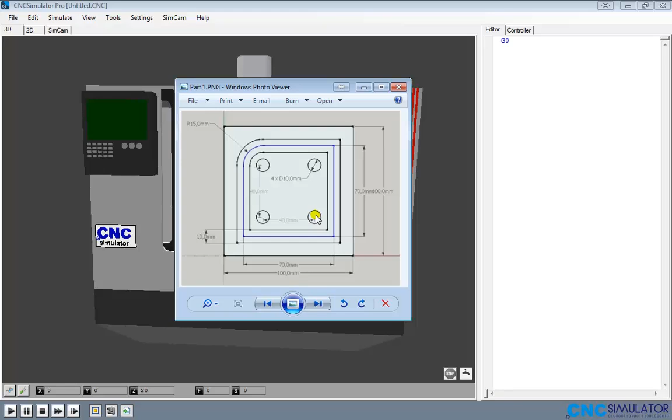And what we need to do is come up with the code in order to tell the machine to do this. I'm going to move this over to the side. You can keep yours open for reference as well.

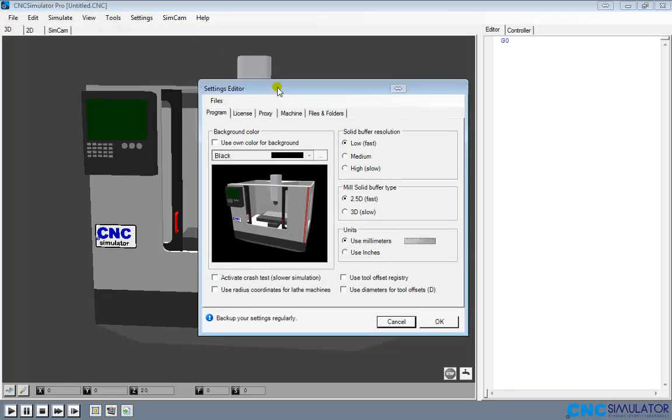The first thing we need to do is set up our units and load the correct machine. We can do that by going to Settings, and then going to Settings again. Go ahead and wait a second for it to open up. Alright, so we need to make sure we check our units here - right now we're currently going to be using millimeters for our units. Once you have everything okay with that, you can go ahead and select OK.

Then we're going to go back to Settings again, and we're going to go to Inventory Browser. Then what we need to check is to make sure that we're working on My Milling Tools, and we're going to set our tools. Right now I currently have the 2 that we're going to create already open - right now you should see 0 here. We're also going to go ahead and set the materials as well, but not in this area here - it's the mill workpieces we're going to be working on.

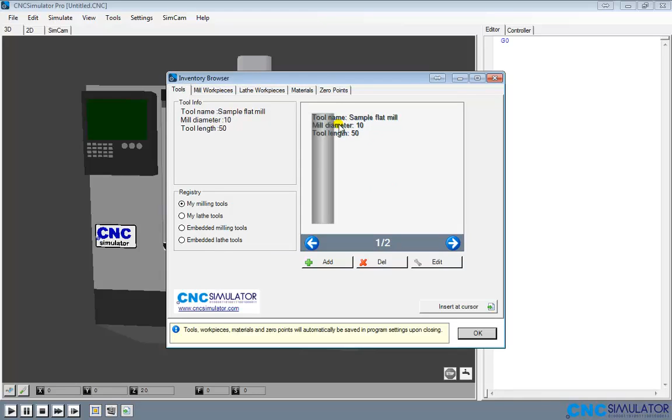So the first thing we need to do is let's set up a part. You can go ahead and click add, and we're going to create our new tool. You can call this sample mill. And then the information we're going to put in here is going to be the diameter. We'll go ahead and pull that out since I couldn't really see it too well - you pop that right back open.

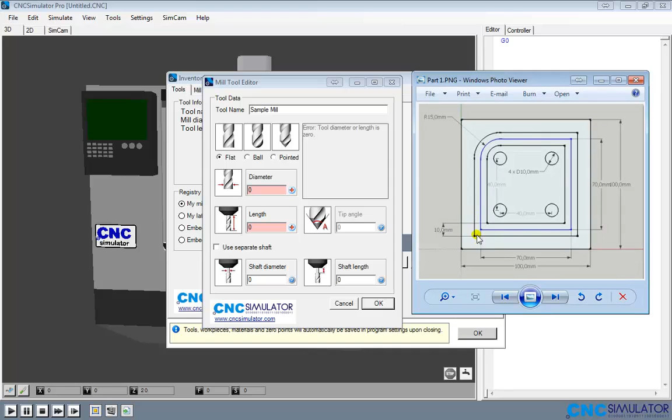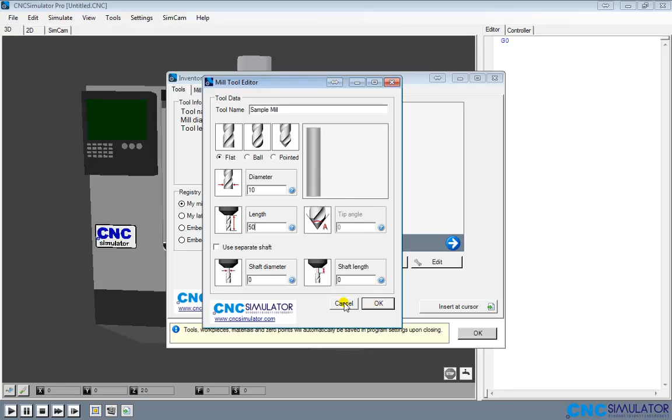Okay, so we need the diameter of this mill to be 10 millimeters, and we can find that within our information in this little left area here - 10 millimeters. So we can go ahead and adjust that to 10 millimeters. Type in 10, and then we're going to give this a length of 50. Once you're done here, you'll go ahead and see a preview. You can go ahead and accept that and hit OK. For now, I'm going to go ahead and cancel that because I already have one created here.

The next one we need to do is create a drill. So let me open this up again. We need to drill these portions here, and these again are going to be 10 millimeters. So we're going to go ahead and go to Add, go to Pointed, go to Diameter, and make that 10. The length will be 50, and the tip angle we are going to put to 80.

Remember, we need to name this, so you can go ahead and call this Sample Drill. And then hit OK. For now, I'm going to hit Cancel because, again, I've already created this.

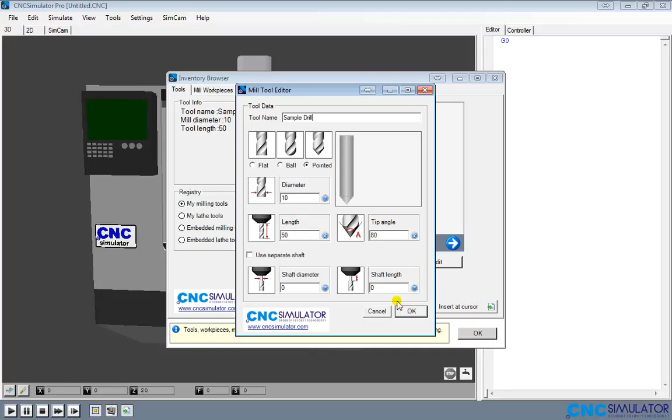So you should see your first tool - I called mine Sample Flat Mill. We have a diameter of 10 and a length of 50, and remember, these are in millimeters. I'll go ahead and move over one more - and again, a drill diameter, a tip angle, and a tool length.

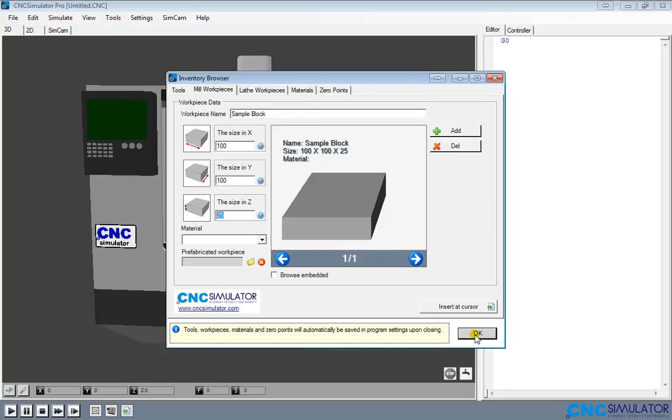Next, we're going to come over to mill workpieces. We'll go ahead and put the size of 100 for X, 100 for Y, and we'll also put 25 for Z. Again, we'll leave everything else the same. We'll go ahead and hit OK once you have all those settings set up. And currently we haven't really seen any changes - that's because we're going to have to come over here to our editor and start working on the code.

I'm going to go ahead and delete this G0 that I have set up from the previous video. Now for starters, I like to comment on everything, and it's very useful when you work on very large programs. In G code you may not really want to, but working in other coding languages you kind of learn to comment, so that way other people can read it and also help you out. So the first thing you want to do is go ahead and add a slash, so the code will kind of ignore this. Now the first thing we need to do is add part to machine.

So for us, we're going to go ahead and hit the $, and you'll see these various codes we can add. What we are looking for, we'll go ahead and type add regular part. If you hit space, it goes ahead and auto-completes it, and I kind of want to see the syntax on that, so let's bring that back up.

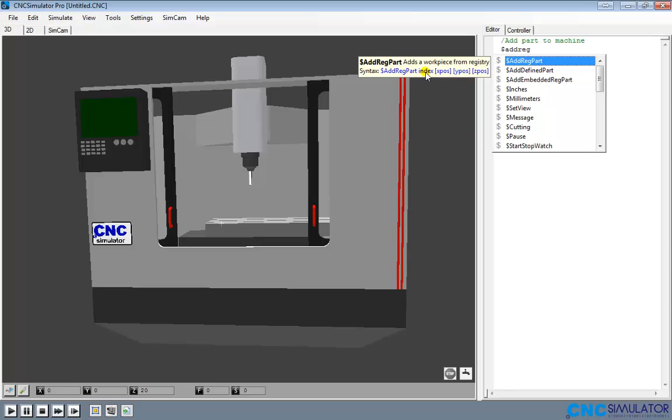I'll go ahead and hit the $, add reg part, it's the first one here. It says adds a workpiece from the registry, so you can go ahead and read the syntax. We're going to have the first portion here that we put, we also have the index - so far we only have the one part, so we're going to put a 1 there. And then we also have the X position, Y position, and the Z position.

Once we're okay with that, again I can hit space and it will auto-complete it for me. Now it's already trying to select the block that we just created once you named it. I'll go ahead and double click on that, and press space. Now we have to put the X and Y position of where we want to place this. Let's go ahead and put - let me delete here a little bit - we'll go ahead and put 30, comma, space, 30. Go ahead and press enter.

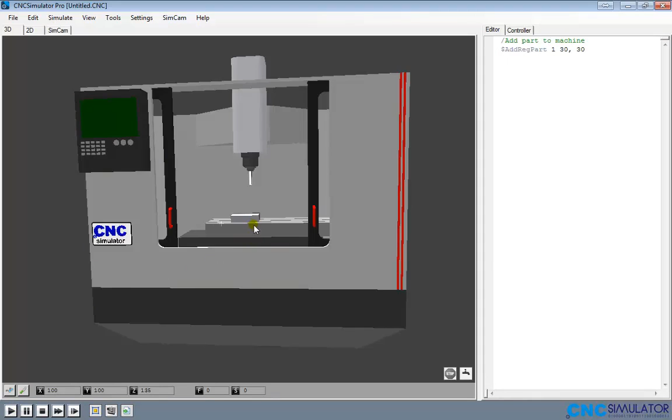Now if you want, you can come over here and press play, and we will see our block added down there. We can go ahead and move this around, zoom in, and there's our piece we're going to be working on. Pretty soon we're going to get this drill, bring it down in, put some holes, and create a design along the outside.

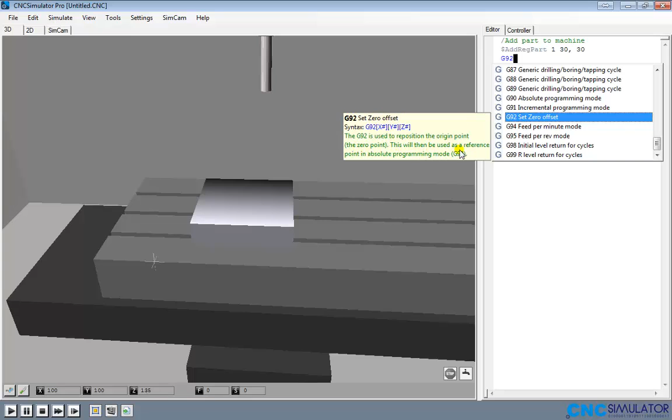So now the next thing we need to do is change this 0 origin point somewhere onto our block, so we have a reference point in our coding. Let's come back over here to the G code. The way to do that, we can go ahead and hit G. Again we see all these references. We'll type in G92, and as you can see here, it is set 0 offset. The G92 is used to reposition the origin point, the 0 point. This will then be used as a reference point in absolute programming mode, G90. So that's exactly what we're looking for.

We'll go ahead and set the position of this top point here. We're moving it from here over to here and then up in the Z direction. So we'll go ahead and put X30 - let me go ahead and use the keyboard over here - Y30, and then we'll put Z25. Again, you can go ahead and put caps or lowercase. I should probably put these as capitals, so I'm going to go ahead and keep everything similar so it's all uniform.

And again, let's go ahead and comment all of our code so we know what we're doing. So that's going to go ahead and set the 0 point. Again, let's go ahead and push play. And you notice this 0 reference point was moved to the top of that block right there. Let's go ahead and go back to the code.

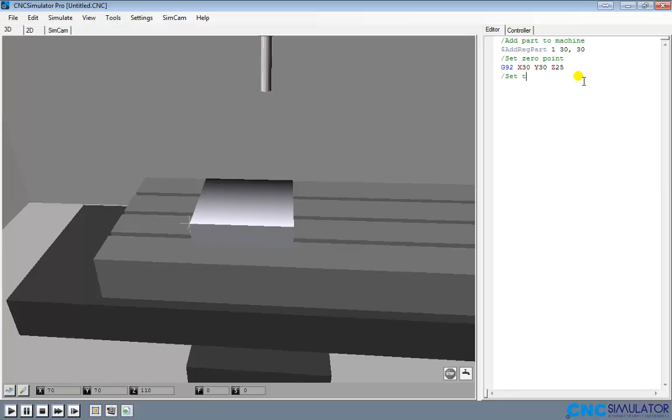Now the next thing we need to do is set up the tool and change it. So we'll go ahead and comment that - set tool and change, if I can go ahead and spell that correctly. So in order to change your tool, we'll use a T, and then that will go ahead and select the tool that we want to use. We'll go ahead and hit this T1. Now yours can be a different number than what I have here, but I'm going to go ahead and just double click that to accept it.

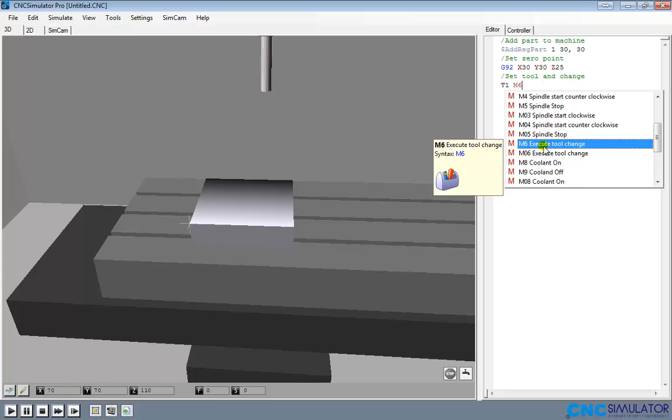I'll go ahead and press space, and we'll do M and we will pick a 6. Don't worry too much if you don't know what all these codes are doing so far just yet. We're just working through a process, trying to get some codes down, and I have reference material for you to learn some of the codes, and we'll build some different codes for different patterns we're going to look at, so we'll get more and more comfortable with what it is that we're doing. So this will be execute tool change. We'll go ahead and accept that. Then what we need to do is move the tool to the location where it's going to start to work at, so we'll go ahead and comment on that.

Let's go ahead and drag this over a bit so you can see it. I should have put all that in caps, but we'll keep it for now.

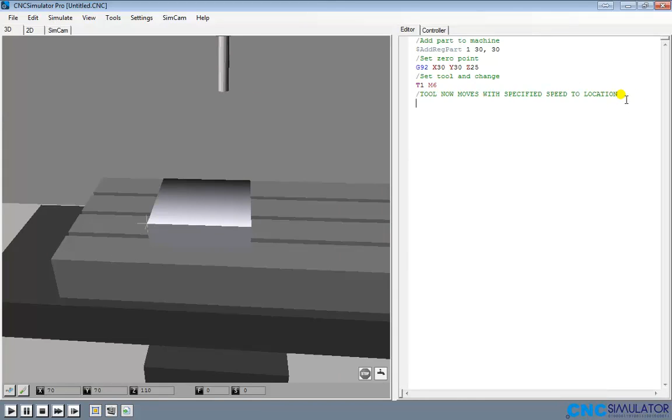Next thing we need to do is type G00. This will be a fast traverse, so reposition to a new location with high speed. We don't actually want to drill into this block with this speed, it's just to get into position as quickly as possible. So we'll go ahead and put G00.

Then we're going to put the position where we want to put the drill at. So we're going to put X15, Y15, space Z2. I'll go ahead and hit enter.

We'll comment for our next line. What we need to do is change the motion of tool, and then set the feed and spindle. Don't worry too much about the feed and spindle just yet, we'll cover that in a later course.

So what we're going to start with is G1. This will be a linear feed traverse. We're taking it off the G00, which is the fastest — you don't want to be doing any of your drilling at the quickest speed possible. Then from there, we're going to move the Z down by 5.

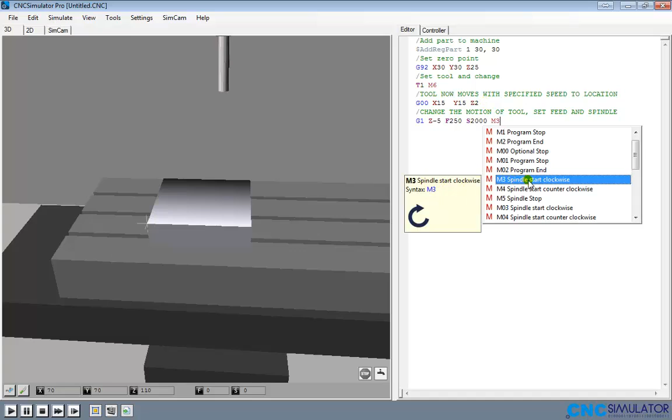And then we are going to set the feed, which is F250 for now, and S will be 2000. Then we have to specify the direction we'll be spinning with M3. Right now we're going to put clockwise. I'll go ahead and double click to accept that.

Let's go ahead and hit play to see what happens here. As you can see, it's reading the code and it moved into position. So everything's looking okay so far.

Next we're going to comment again. We're going to move in one direction in Y, so we'll put the new coordinate — we want to move to Y70. I'll go ahead and hit play so we can see this again. And there's our first motion across that block there.

Next, we need to set to arc motion, which is actually an interpolated motion, meaning it's going to be moving along an X and a Y axis at the same time. This first motion here was only along the Y, so the X position was kind of held fixed. Moving across an arc, you can guess, is going to be moving along the X and Y at the same time. Then we need to specify the end point of the arc and the center of the arc as well.

So we can go ahead and comment that. Let me drag this out a little bit more so we can see it. So we're going to set the arc motion and specify endpoint and arc center. So how do we do that?

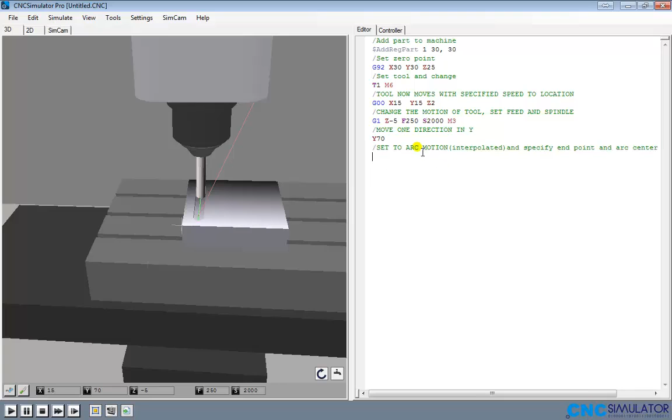First thing we need to do is turn it into an arc motion and take it out of this linear mode. We can do that by hitting G2 — arc interpolation clockwise, so circular interpolation clockwise. Circle center is by default, etc. As you can see, it kind of arcs over.

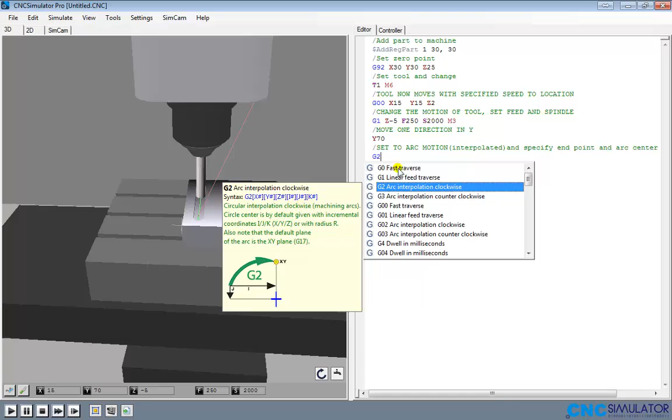We have an I and a J — as you can see, this is the syntax. We're going to give it an X, a Y, a Z, an I, J, K. So it just gives you the endpoint and then another X, Y, Z for the center of that actual arc where it's going. I'll go ahead and accept that for now.

And then the coordinates we're going to be using are X30, Y85. We're going to have I15, J0. If you're wondering where I'm getting all these numbers from, I'm looking at this part here, and this is the arc that I'm going ahead and curving across, and I'm just making a center here, telling where the endpoint is going to be at.

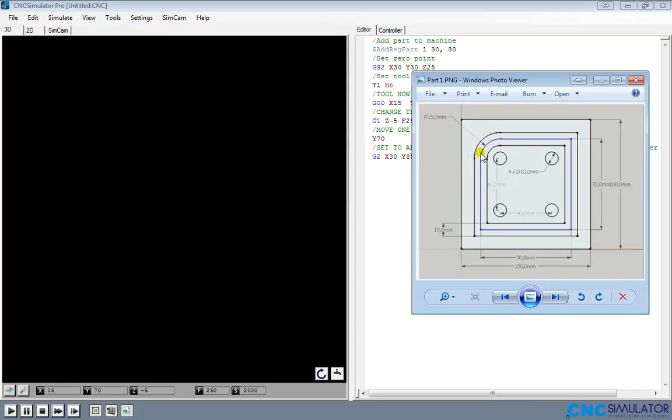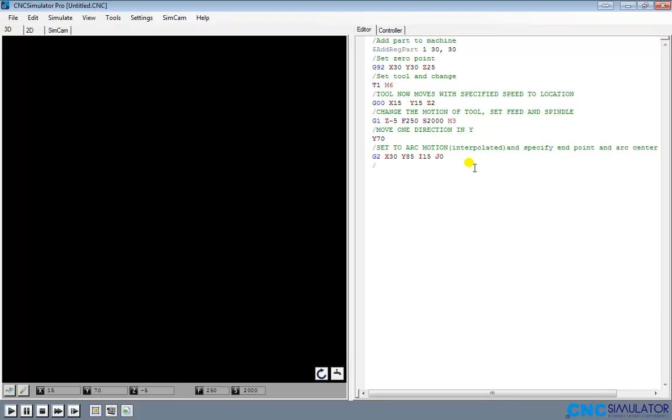Okay, so now let's just see what this plays out to be first, so you can see what we're doing. So here it comes across, and then it goes across the arc, just like that.

From there, all we need to do is traverse straight across here, straight across down, and then straight back across. So all we need to do is give this an X distance to go across, a Y distance to come down, and then an X distance to go across. For our comments, we can put: now enter the rest of coordinates and set motion back to linear.

So we'll go ahead and put G1, with a capital G1. I'll double click it to accept it. And then we're going to do X85 as our next position. Now the rest of them I'm going to put on separate lines: Y15, X15.

Because each of these is going to be an individual movement — one movement, one movement, one movement. So it's going to read one block of code at a time, one line of code at a time. So let's go ahead and play this out to make sure everything is looking good so far.

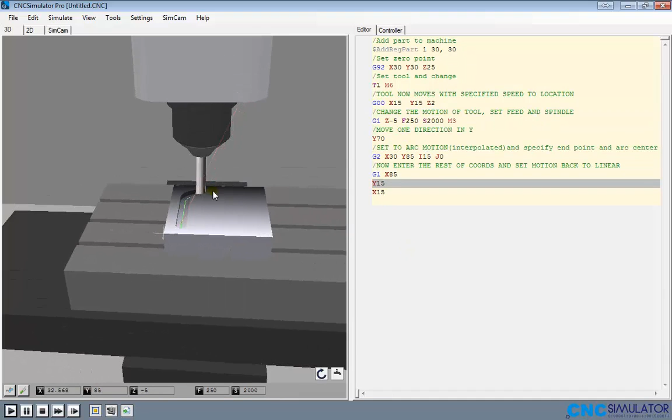Okay, it's moving across. Now it comes down and moves back towards the left. It's looking good so far.

So now what we need to do is drill our 4 holes. In order to do that, we are going to have to move away from the part and then change to drill.

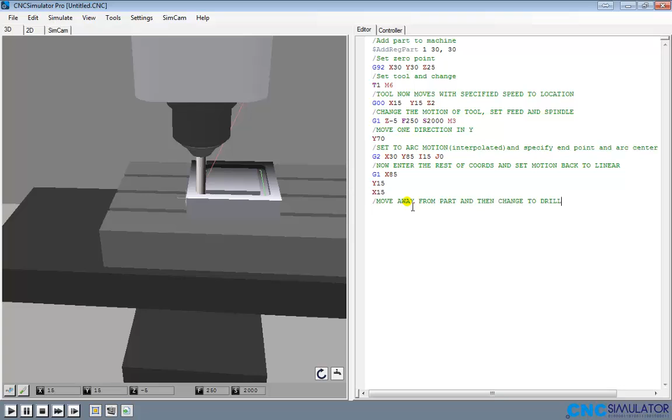So if you remember from up here, this is how we set our tools and we changed it. So we can start with the T, we'll go ahead and pick that second tool there, and then hit M6. We'll go ahead and execute the tool change just like before, T1 M6. Now we're doing a T2 M6.

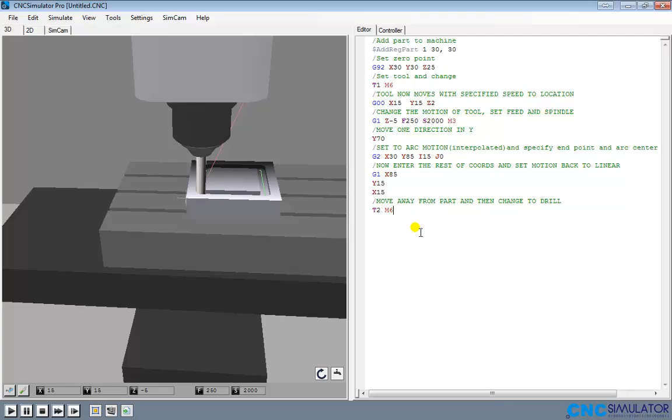So this is the T code here, and this is referred to as maybe an M code. So let's go ahead and play that out one more time.

And then it completes the part, moves away, and it changes the tip. So now let's go ahead and move it to the location where it needs to go to.

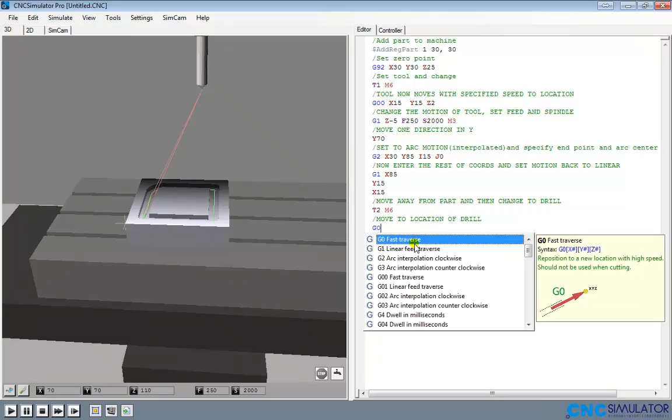I'll go ahead and do G0 to give it a speed, because we want to quickly go to that location. X30. Let me put in that again. X30, Y30, and the last one is going to be a Z2, just slightly above our 0 point.

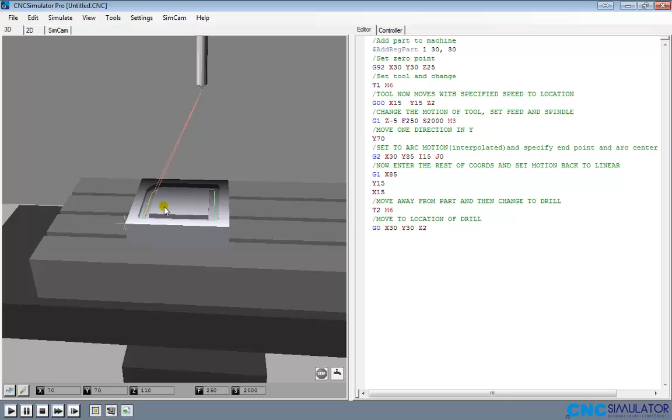So now what we need to do is, once it's hovered over that position, we need to tell it to actually come down and drill, move up, and then go to the next positions. And also, since we're doing a drill, it's moving a lot quicker, we need to add some coolant to make sure it doesn't overheat.

So we'll tell it to drill multiple positions, and add coolant. Okay, so we can do that by doing a G81.

And as we hover over it, we get this here. So we're going to drill in, drill up. Z is a total depth, and R is a start plane. Don't worry too much about all these here, but as you can see, the syntax for the rest of this code is going to be an X, a Y, a Z, and then an R.

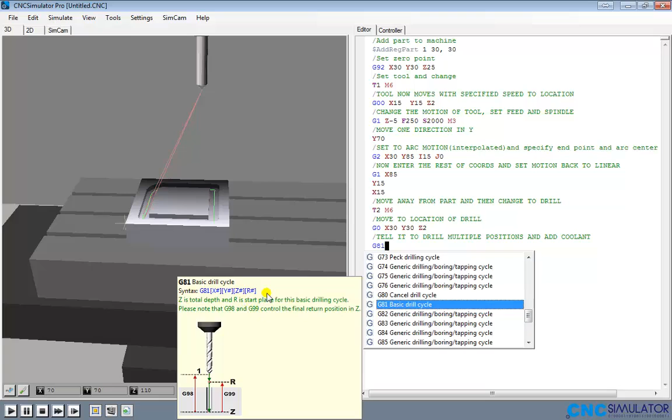So let's go ahead and tell it, for starters, the Z is going to drop by 15. We'll give it an R of 1. Don't worry too much about that just yet. And then we'll also add in a few more codes here.

We're going to set, not the speed, the direction that it's going to spin. And then we're also going to do M8 to turn that coolant on.

So we told it that we're going to drill multiple positions, that's this first portion here. It's going to drill down just like so, and then we're going to add the coolant right there.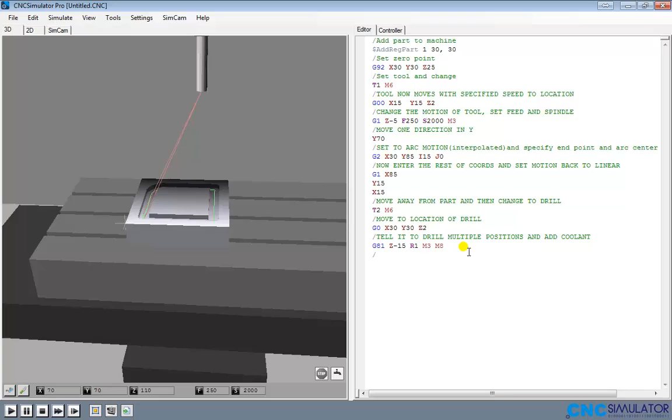Now what we need to do is we need to move to a new position. So again, I'm going to go ahead and play this out just one more time. You can see this first portion here.

We can also go ahead and use this button down here to step by one step at a time and read through the code. So it finishes, now it's going to move away. It's going to quickly move to position, and it's going to drill one hole.

So all we need to do now is specify the new positions relative to this point here. So I'll go ahead and hit Y70, X70, Y30. And then once we're done, we need to end the drill.

And we can do that with a G80. And after that, we'll go ahead and use a Z50 and M30 to end the program. I'll go ahead and delete that like so.

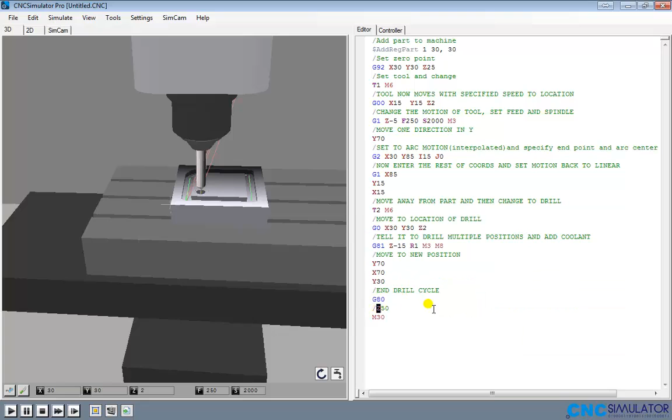And now, once our code is completed, let's go ahead and run it one last time to see if we can get our completed part.

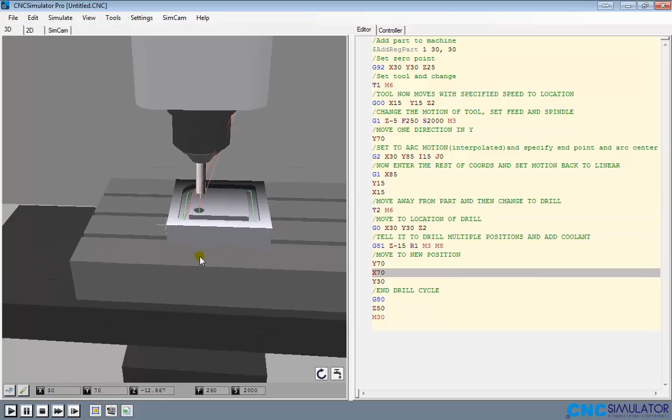Now it moves away for the last 4 holes. And there's our part. We can go ahead and move around a bit more.

Move around to look at it, and it looks pretty nice.

Now this is a good example of some simple code where we can create a pattern and do a drill and add some coolant. You can go ahead and try and experiment with some patterns of your own.

I went ahead and gave a little assignment to come up with the X, Y sketch, where you can kind of sketch out something on a piece of paper and try and construct some code of just the simple movements of moving around, maybe finding the arcs of the locations, and seeing if you can construct the code for that.

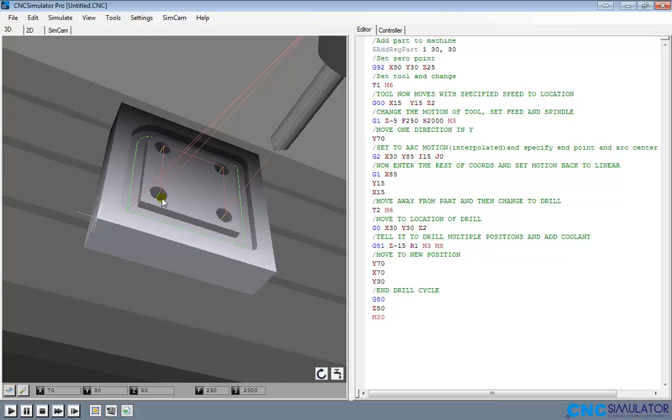I'll be covering various other parts, and again we'll be looking at various other types of machines. We'll do some milling here and here. We'll look at a router, as well as some other parts that maybe people might recommend to know a little bit more about.